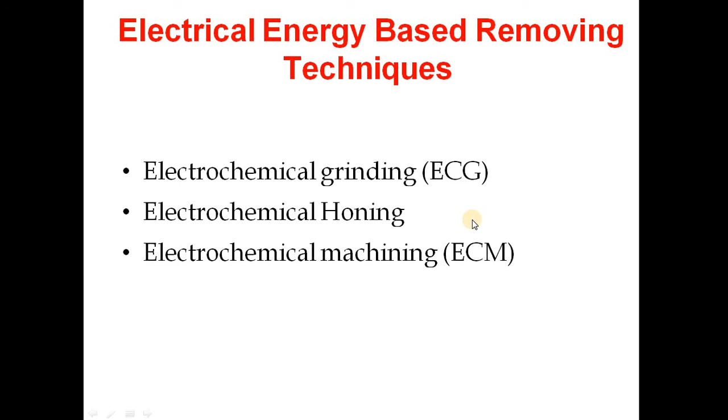First we have to check the overview of electrochemical grinding. Electrochemical grinding is a variation of ECM that combines electrolytic activity with the physical removal of material by means of electrically charged wheels. It can produce burr-free and stress-free parts without heat or metallurgical damage caused by mechanical grinding, eliminating the need for secondary machining operations.

In conventional machining, after one machining operation, for a better surface we require another secondary machining. But in electrochemical grinding, we do not require secondary operations. Like electrochemical machining, it generates little or no heat which can distort delicate components.

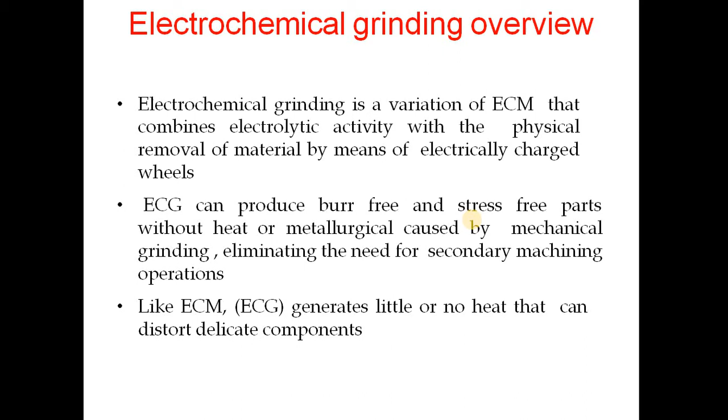What is the definition of electrochemical grinding? It is a special form of electrochemical machining which employs the combined action of electrochemical attack and abrasion for rapidly removing material from electrically conductive workpieces, usually hard tough materials. It is a non-abrasive process and therefore produces precise cuts that are free of heat, stress, burr, and mechanical distortion.

In ECG, that is electrochemical grinding, it is a variation of electrochemical machining that uses a conductive rotating abrasive wheel.

ECG can be compared to electroplating, but with major differences. ECG depletes material from the work and deposits it in the electrolyte. However, it does not plate material from the work onto the wheel. So electroplating is different from electrochemical grinding. In electroplating, we deposit material from one point to another, but in this process, it is the process to remove material from the workpiece.

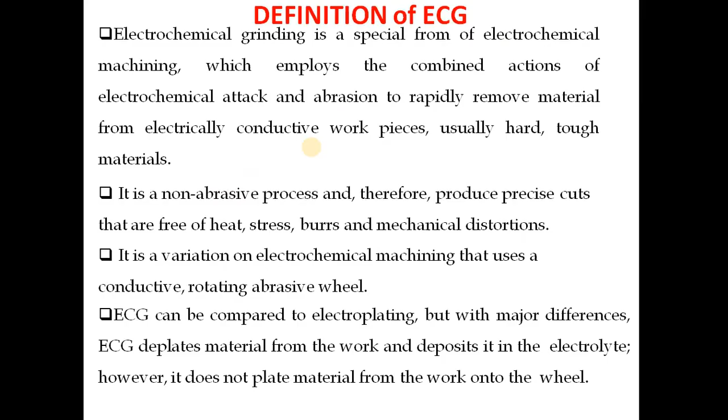This is the electrochemical grinding procedure layout. We have the electrolyte solution which is pumped using a pump. A filter removes burr or dust particles from the solution. With a proper pressure gauge, we adjust the pressure, and this controlled pressure is supplied onto the workpiece with respect to the grinding wheel using a flow meter.

The flow meter regulates the flow. Positive is supplied to the workpiece, while the negative source is supplied to the grinding wheel. The material is removed by the electrolyte plus grinding wheel action on this insulating grit. All the removed material is collected in this particular tank.

What is the working principle and how does it work? This is a grinding wheel having rotation. This is a workpiece whose material is to be removed. The material is removed in three phases: phase 1, phase 2, and phase 3. Phase 1 is the initial phase, phase 2 is semi-finished, and phase 3 gives the finished material.

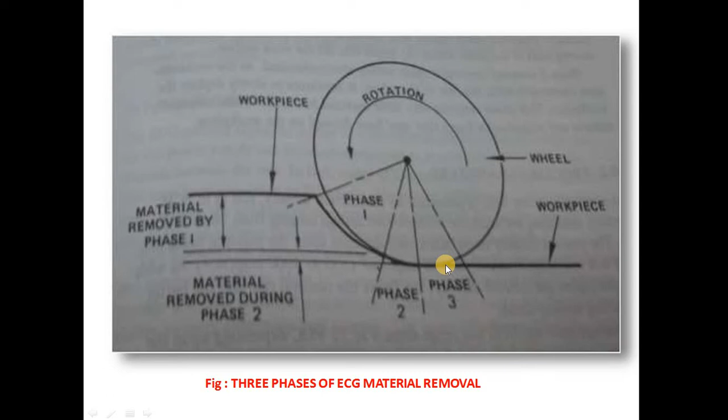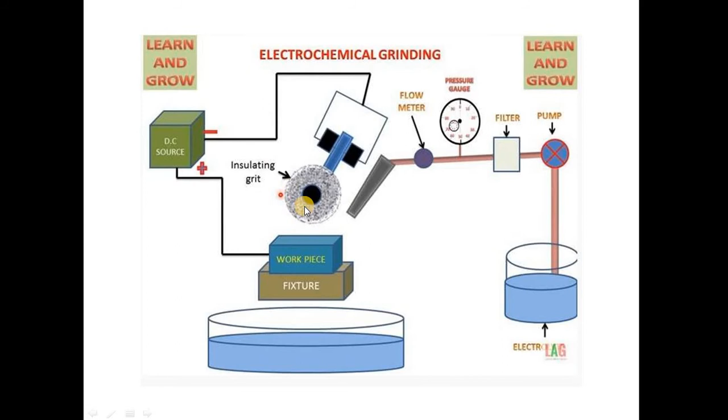In electrochemical grinding, the electrolyte solution is provided such that the maximum amount of material is removed by the electrolyte solution, and a small amount of material is removed by the grinding procedure.

The wheel and workpiece are electrically conductive in this process. The wheel lasts for many grindings. Typically 90% of the metal is removed by electrolysis, and only 10% is removed by the abrasive grinding wheel.

This makes it capable of producing smooth edges without burrs caused by mechanical grinding. Normal mechanical grinding is also done here, but in addition, the electrolyte solution removes a much larger amount of material compared to the grinding action.

It does not produce appreciable heat that would distort the workpiece, because the electrolyte solution not only removes material but also cools down the workpiece. It decomposes the workpiece material and dissipates it into the electrolyte solution. The most common electrolytes are sodium chloride and sodium nitrate.

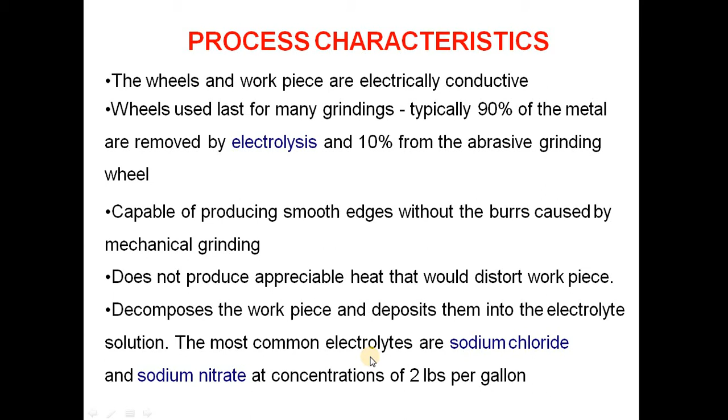These are the two solutions, electrolytes, which can be used to remove the material at a concentration of 2 lbs per gallon. So what are the machining conditions for ECG?

There are different machining conditions commonly used for ECG. Feed rate is up to 0.25 mm per minute, gap is 0.025 mm, grinding wheel speed is near about 25 to 30 meters per second, voltage 5 to 15 DC volts applied, current density is 50 to 200 ampere, and metal removal rate is 100 to 500 cubic millimeter per minute per centimeter square.

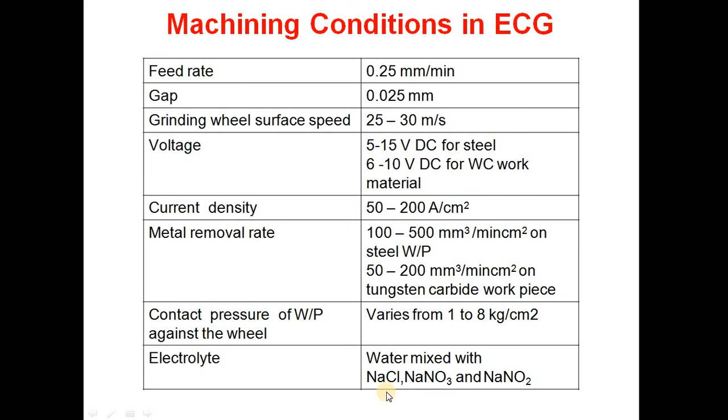We also use contact pressure of near about 1 to 8 kg per centimeter square. Electrolyte solution is NaCl (sodium chloride), NaNO3, NaNO2 mixed with water. Accuracy obtainable is near about 0.010 mm, so up to 10 micron accuracy can be achieved. Surface finish of near about 0.1 to 0.2 is possible.

Power of the driving motor is generally a single HP motor. The pump used is 0.5 HP. Operating current range is 150 to 300 amperes, and the rating of the power pack is near about 3.5 kilovolt.

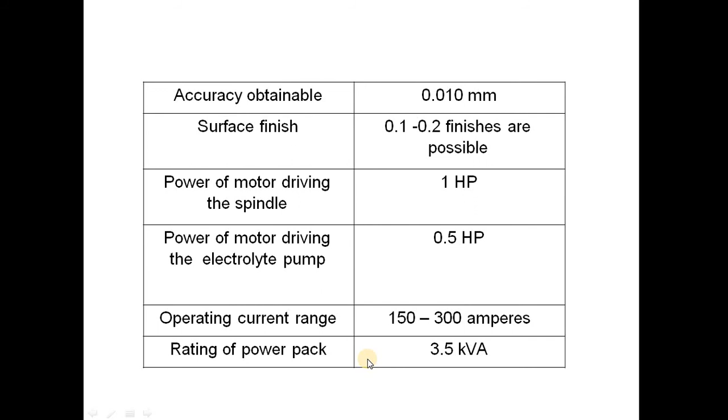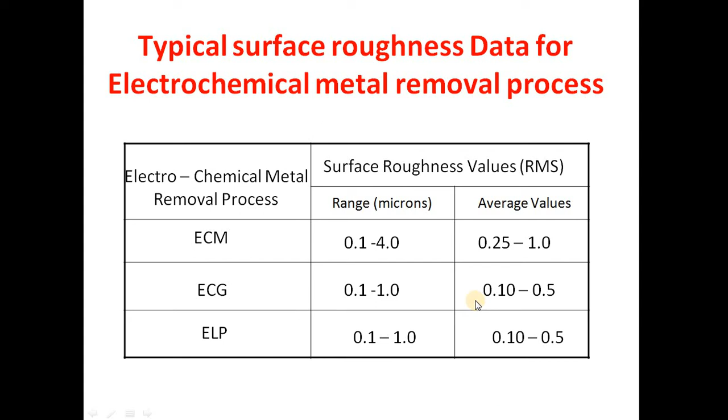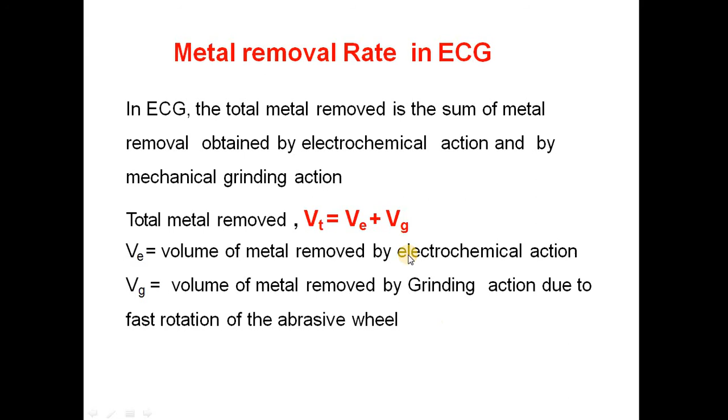So what is the MRR, that is material removal rate, in electrochemical grinding? In ECG, the total material removed is the sum of the metal removed by electrochemical action and by mechanical grinding action. About 90% of material is removed by the electrochemical solution and 10% by mechanical grinding. So total material removed Vt equals V electrochemical plus V grinding. Ve is the volume of metal removed by electrochemical action, while Vg is the volume removed by grinding action due to the fast rotation of the abrasive wheel.

So what tolerance do we get? The tolerance that can be achieved using electrochemical grinding depends greatly on the material being cut, the size and depth of cut, and the ECG parameters being used.

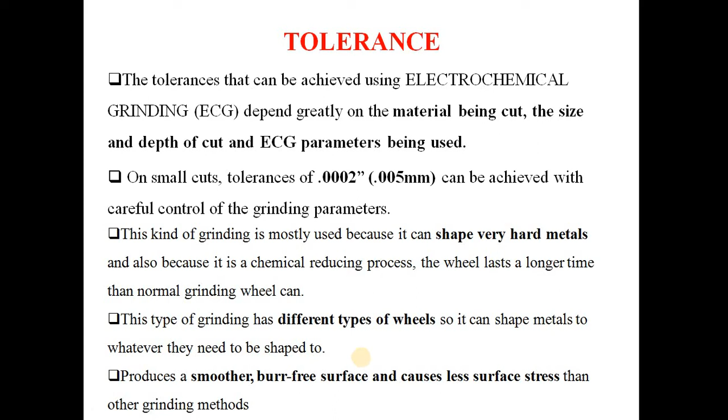On small cuts, near about 5 microns tolerance can be achieved with careful control of grinding parameters. This kind of grinding is mostly used because it can shape very hard metals, and also because it is a chemical reducing process, so the wheel lasts longer than a normal grinding wheel. This type of grinding has different types of wheels, so it can shape the metals however they need to be shaped. It produces smoother, burr-free surfaces and causes less surface stress than other grinding methods.

An important point to observe for successful ECG results: the ECG equipment must be in good condition to achieve the best results in electrolytic grinding. Remember, in electrochemical grinding the wheel life is much more than conventional grinding life, because 90% of the material is removed by chemical reaction.

Another important point for successful ECG: the carbide workpiece should not be allowed to dwell against the wheel, as this will result in pitting. This is the most important point. The diamond wheel must be kept clean in order to maintain the proper gap between the anode and cathode. A soft dressing stick or aluminum oxide may be used for this purpose. Remember, you must maintain a constant gap between the diamond wheel and the anode and cathode.

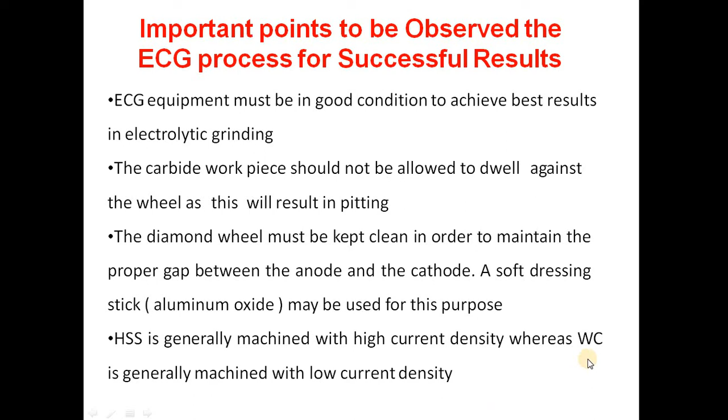So HSS is generally machined with high current density, whereas tungsten carbide is generally machined with low current density. Now, control of overcut in ECG. In any process, overcut or undercut is a major problem while machining. In electrochemical grinding, the following machining parameters affect the overcut.

Number one, voltage. Overcut is directly proportional to the voltage in electrochemical grinding. Number two, current density - you have to maintain the proper current density as mentioned earlier. Number three, electrolyte - overcut is directly related to the electrolyte strength, it should not be very strong, as that would cause overcut.

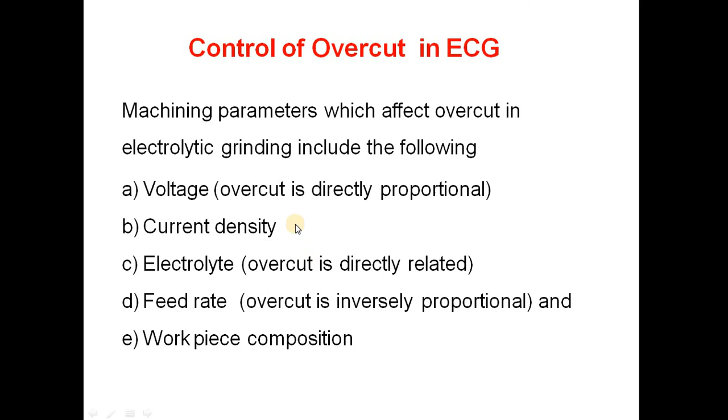Feed rate - the feed rate of the grinding wheel as well as the feed rate of the electrolyte solution is maintained constant throughout the grinding or machining process. And workpiece composition - these are the parameters which control the overcut in ECG.

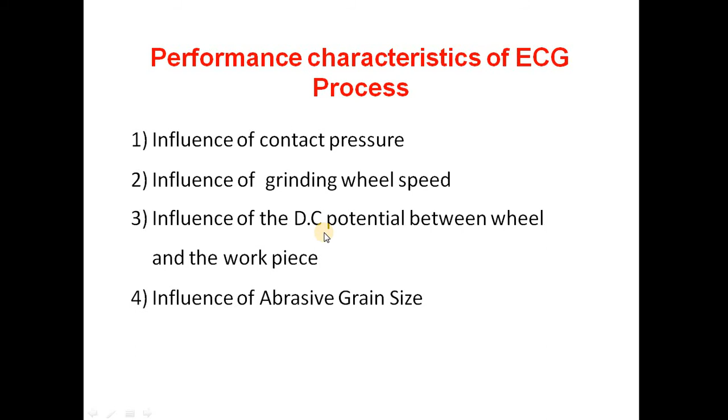So what are the performance characteristics of ECG? There are different performance characteristics: influence of contact pressure, influence of grinding wheel speed, influence of DC potential between the wheel and the workpiece, and influence of abrasive grain size. Number one is influence of contact pressure.

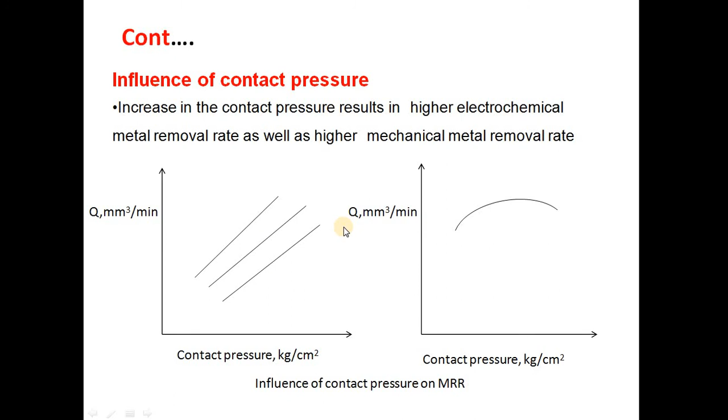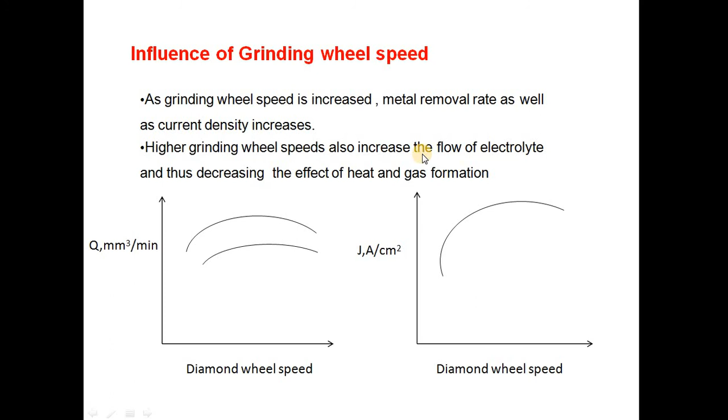Next is influence of grinding wheel speed. As you increase the grinding wheel speed, metal removal rate as well as current density also goes on increasing. At the same limit, it is directly proportional. As we increase the wheel speed, metal removal rate goes on increasing, but beyond a certain speed you cannot increase it further. Higher grinding wheel speed results in increasing the flow of electrolyte and thus decreasing the effect of heat and gas formation.

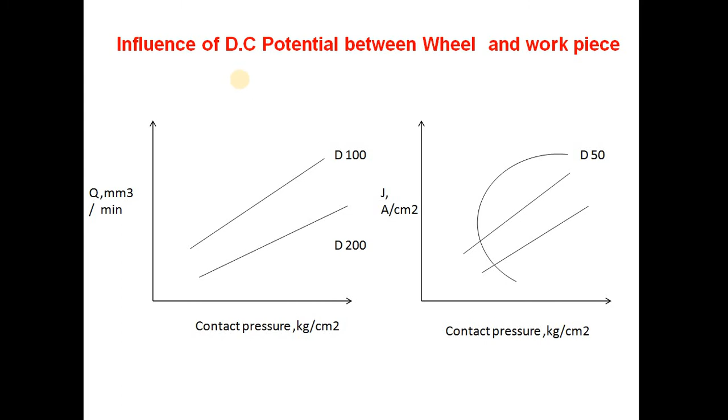So what are the different wheels that can be used for electrochemical grinding? Number one is diamond wheels. These wheels are used to electrochemically grind flat surfaces of tungsten carbide tools and other carbide parts. These are the commonly used wheels, diamond wheels.

Non-diamond face wheels are used for grinding a flat surface of steel and alloy steel. Where exactly flat surfaces are required, you can use non-diamond face wheels. The abrasive used in this type of wheel is aluminum oxide for non-diamond face wheels.

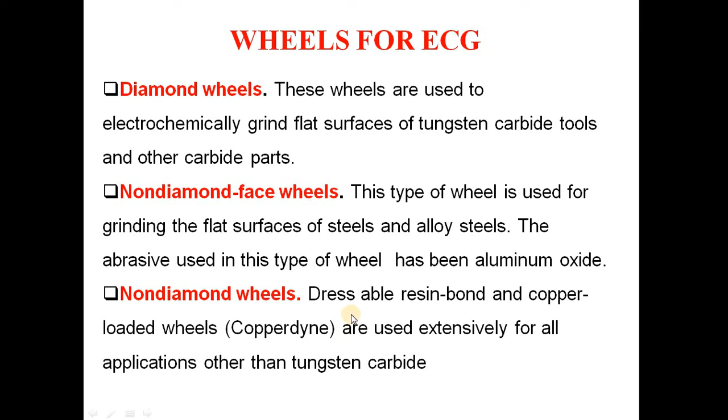Third is non-diamond wheels. Dressable resin bond and copper loaded wheels are used extensively for all applications other than tungsten carbide. For tungsten carbide use diamond wheels, and for other than tungsten carbide material, you can use non-diamond wheels for making a high flat surface of steel and alloy. You can use non-diamond face wheels.

Diamond wheel has a common specification used in electrochemical grinding: it has a cup shape, metallic bond bronze, diameter near about 250 mm, width of rim near about 20 to 25 mm, diamond concentration about D100, diamond particles of 100 to 200 mesh size, wheel speed near about 1800 meters per minute, and grinding ratio near about 80.

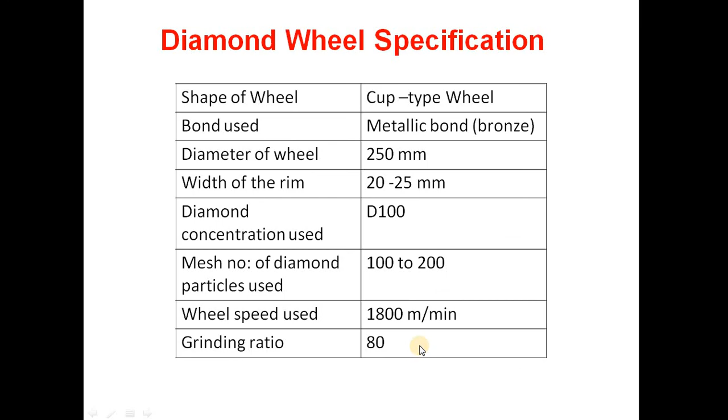So what is the function of the abrasive wheel? During ECG, the abrasive performs the following functions: it removes the electrically resistant film from the face of the work. The abrasive provides an electrically insulated gap between the cathodic wheel and anodic work. Without this, there would be a direct electrical short, resulting in damage to both the wheel and the work.

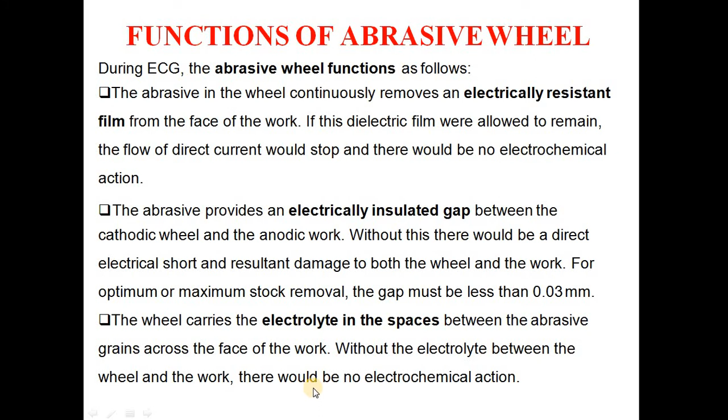For optimum and maximum stock removal, the gap must be less than 0.03 mm. The wheel carries the electrolyte in the space between the abrasive grains across the face of the work. Without electrolyte between the wheel and work, there would not be any electrochemical action.

So what are the electrolytes used for electrochemical grinding? For ferrous, nickel and cobalt alloys, we can use sodium chloride. For tungsten, we can use sodium nitrate. For titanium, zirconium and columbium, we can use sodium chloride. For tungsten and molybdenum, we can use sodium carbonate or sodium hydroxide. For copper or silver, you can use sodium nitrate.

The temperature must be in the range of 30 to 35 degrees Celsius for the electrolyte, and the pressure used is near about 35 to 70 kilopascal.

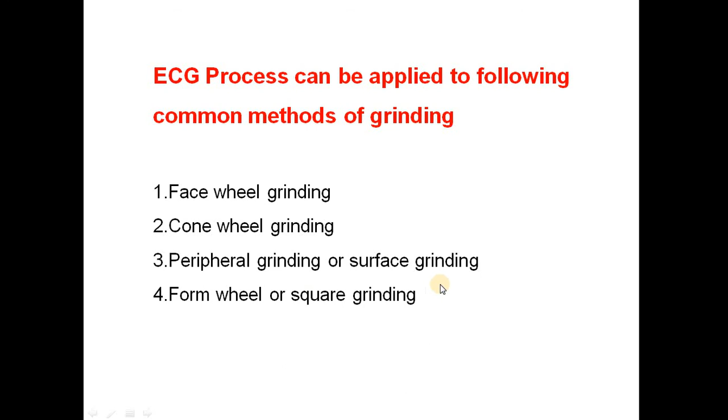ECG process can be applied for the following common methods of grinding: face wheel grinding, cone wheel grinding, peripheral grinding or surface grinding, and form wheel square grinding. So what are the advantages of this particular ECG?

ECG increases wheel life due to negligible wear, because 90% of the material removal is done by the electrochemical reaction. Fixtures used for holding components are simple in construction. Another advantage is that cutting tools with specially shaped tips can be ground quickly.

There is no heating problem, so no surface cracks are produced in electrochemical grinding. We can get a surface finish up to 0.25 micron from ECG. There is no metallurgical damage from heat, and cost of grinding is reduced by 25 to 40%. More precise tolerance can also be achieved by electrochemical grinding.

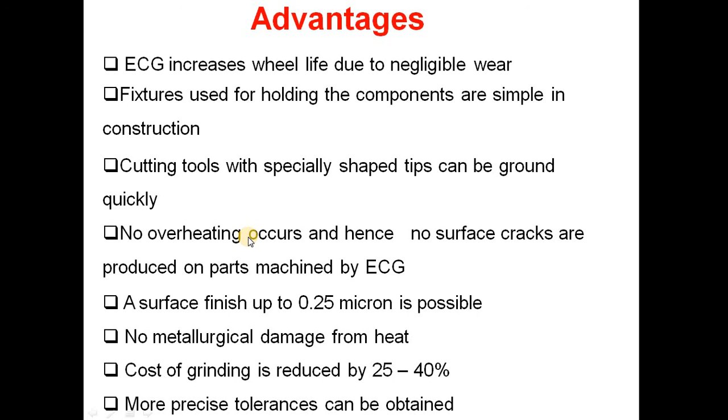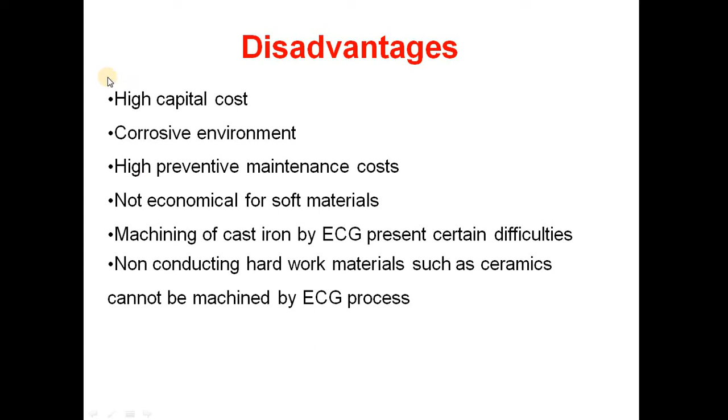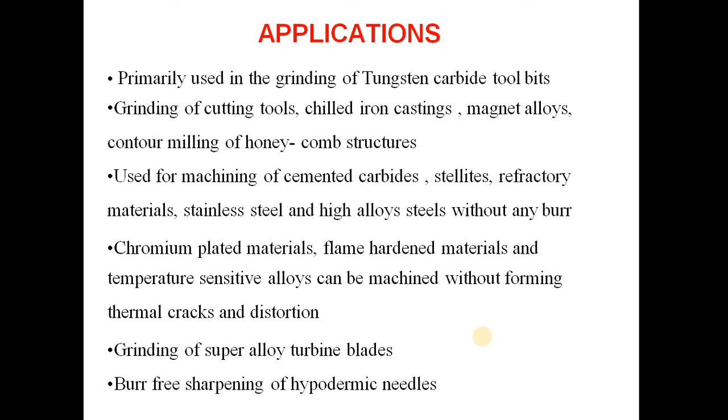Chromium plated materials, flame hardened materials, and temperature sensitive alloys can be machined without forming thermal cracks or distortion by ECG. Grinding of super alloys, turbine blades, etc. is done by ECG. Burr free sharpening of hypodermic needles can also be manufactured with this particular ECG.

So this is all about ECG, that is electrochemical grinding process. If you have any doubt or query, then comment in the comment box.